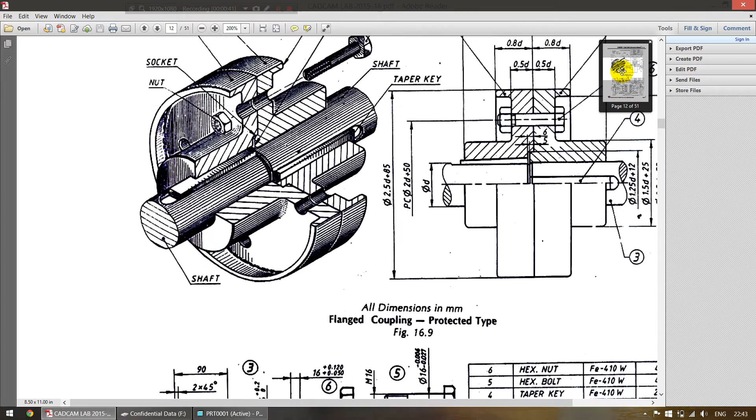Before drawing, I have a reference for the flange. I have a diagram, and usually the flange coupling looks like this. This is used for transmitting power and motion.

There are two flanges which are fixed by a bolt nut, actually four pairs, and these two shafts are used for transmission of motion and power.

And for rigidity in the shaft, we use a keyway, and we place a key in the keyway so that it's not free to move. Instead of a taper key, we use a flat key in this drawing, because a taper key would be a bit more complicated, and we'd see it in later stages.

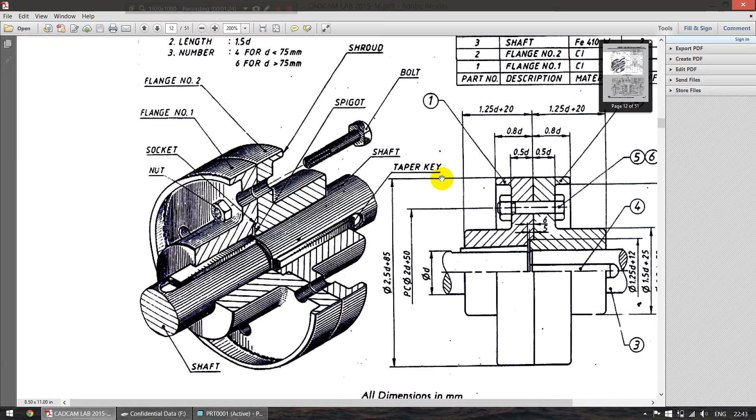So let's come to the protected type. We're actually drawing a protected type flange coupling, because in unprotected we don't have this extrusion, so it doesn't make a big difference. We'll see this, and then later on we'll move on to the unprotected type too.

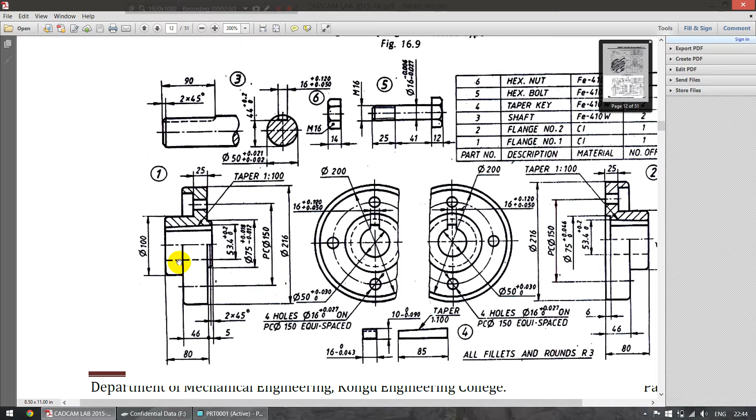So to draw a flange, let's go for flange number 1. This is the diagram for it, and I'm using these dimensions for reference.

This flange, how would you start? That's the main problem for most of us, because once you get to know how to start a diagram, it's easier later on.

So for me, I feel the best way would be, since it's a circular object, it would be better to revolve around 360 degrees. So this is the reference line as they have given, and there's a solid body here.

So draw the top half of the body and then revolve it around the same axis, so it gives you this circle.

So before starting the diagram, properly read the dimensions and understand the diagram clearly. If not, the complete diagram would go to waste, because during the assembly it would not be made properly.

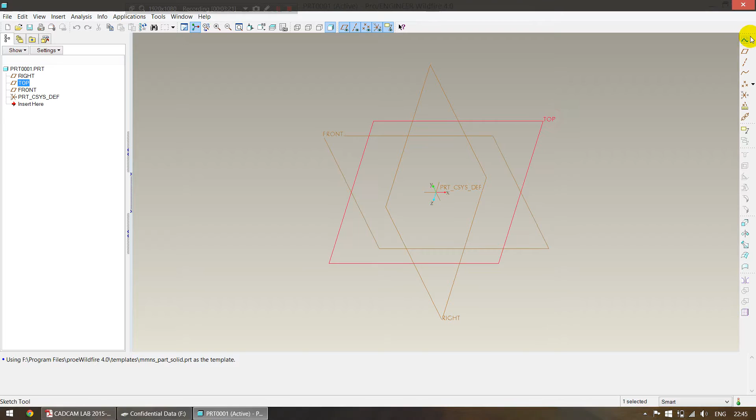Let's draw the rough sketch of this top half. Choose any of the planes and give sketch, and then just draw a rough sketch.

It's all just simple. Do not give these constraints, because it won't let you give dimensions to every single line. So just move a bit away from the constraint.

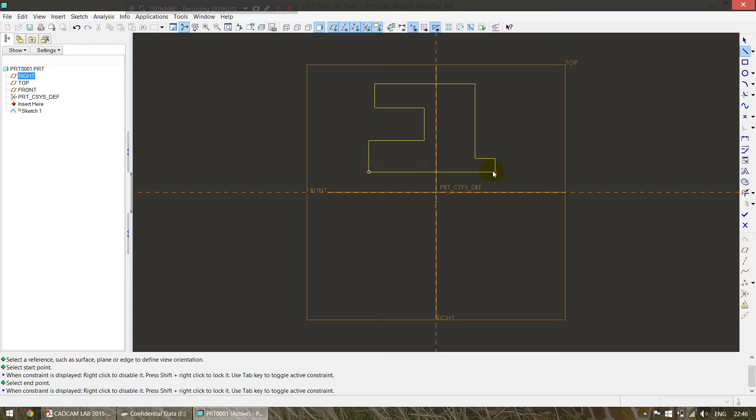Yeah, this is how it would look approximately. So read the dimensions. How much is this distance actually in the diagram?

So this distance, just till the bottom of the keyway. So this whole thing is 53.4, but including this, it would be - this is the diagram for the key, so...

The height of the key is given as 10. So you'll have to minus that length from this total length. So it would be like 53.4 divided by 2, and subtract 10 from that.

So 53.4... that will be around 26.7. So this is 26.7, this whole thing is 26.7, and this thing is 10. So this thing should be 16.7.

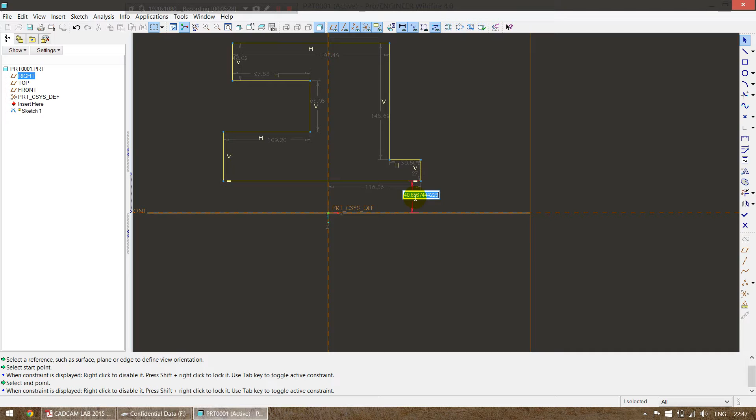So change the dimension just by double clicking it. 16.7.

And then what more dimensions can we give? Yeah, this thing is given. It's 75 minus 53.4, which would give the total length of this and this.

So dividing it by 2 would give one part of it. So 75 minus 53.4 divided by 2, it's 10.8.

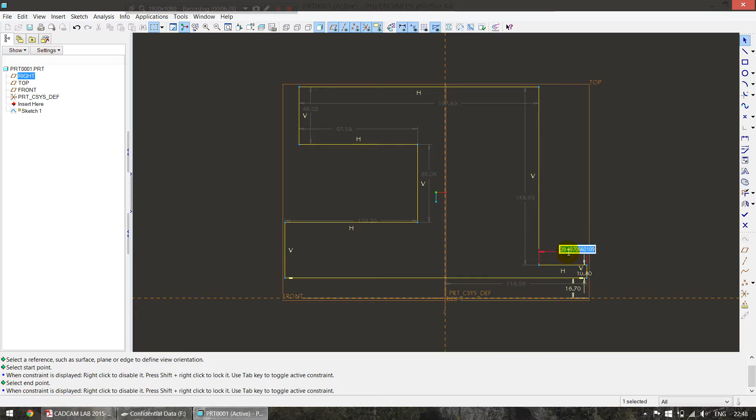It's really small. And the other part of it is this edge. It's given as 5. This part is given as 5. It's smaller than that.

And the height of this part, it's 75, and this whole thing is 216. So 216 minus 75 by 2 would be this whole height.

I'm sorry, this whole height from this point to this point. So given this point to this point, so it's 216 minus 75 by 2.

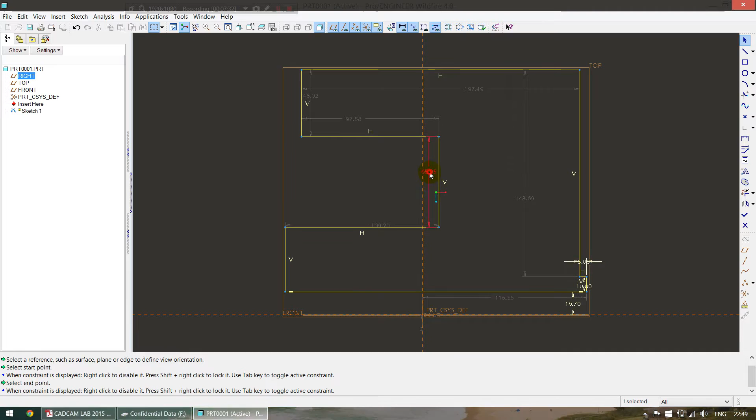It's 17. I'm sorry. It's 70.5. I'm sorry, 70.5.

Okay, so this is 16.7, and we'll have to adjust this height so that it comes back about the axis. So what is this total length?

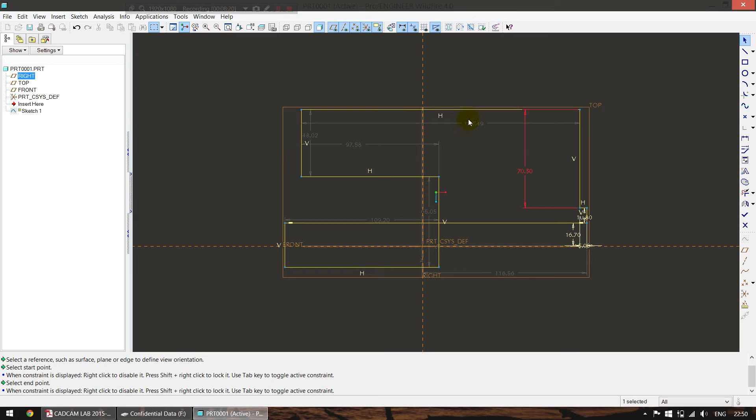This total length is given as 46, the top part of it, because it goes along this way. This total thing is 46. So this total thing is 46,

and I have to reduce all these dimensions now. And this is 97.

So this part of it, how long is this? 46 minus 25 would be 21.

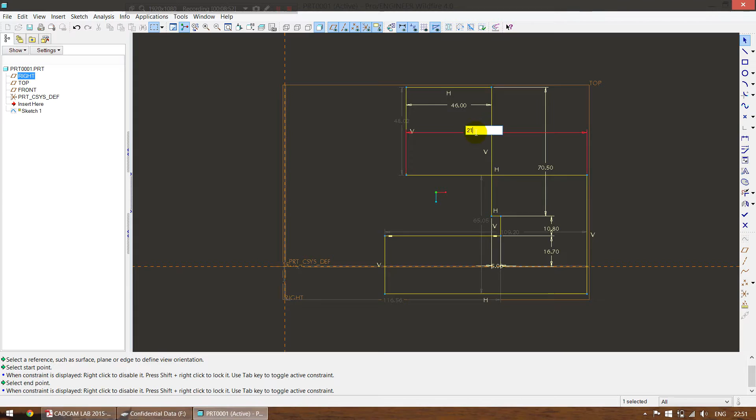So now the only problem is the height of this line. If we reduce that, this thing will come back to the top, and also the height of this. The height of this part can be estimated by this circle, because the total length is given as 216 and the inner diameter is given as 200. So 216 minus 200 is 16, and if you divide it by 2, because we are drawing only the top half, it's 8. So this height is 8.

It's again back to normal, and this height is now, the height of this line is what we need to know now, and this point to this point.

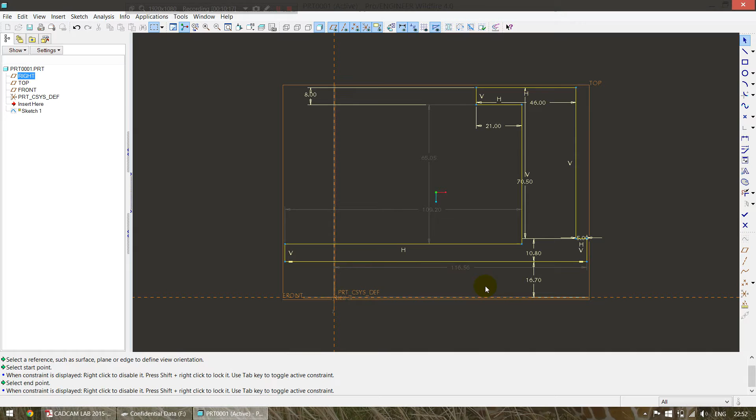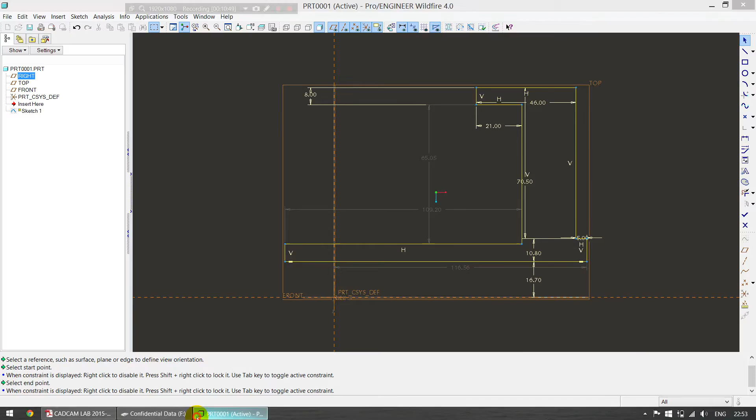Till this point it's 50, so we'll give dimension to that first. This point, it's 50 from this point to this point. So length of this is... this part is 25, so 80 minus 25 would be 55. So this length, it's 55.

Now remaining is this part of the length. So this height would be 75, right? Yeah, that's 75. And this total, this height would be 20 or 108. 108 minus 50, so that's 58.

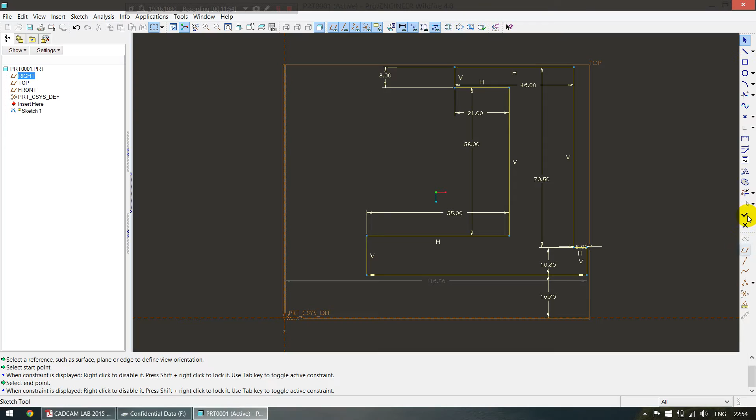So this is how the final object would look like, and if you give a tick mark, it would look like this, the final position.

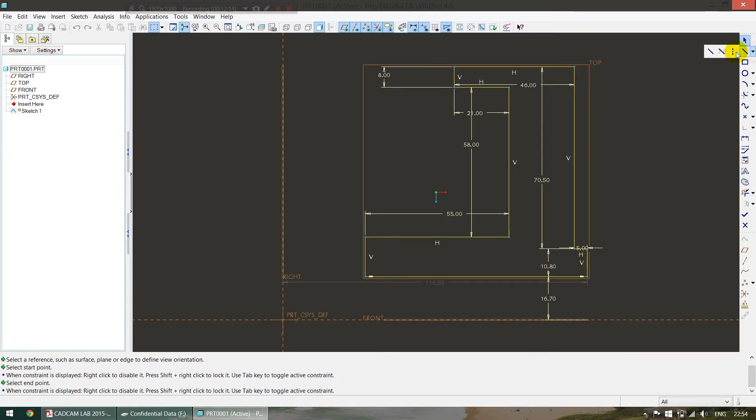So now we are not actually completed, so go to sketch and edit definition. You'll go back into the sketch. So now we need a reference axis, so choose this point and place the reference axis. So we're gonna revolve it along this axis so it comes round. So check this and come out of the drawing.

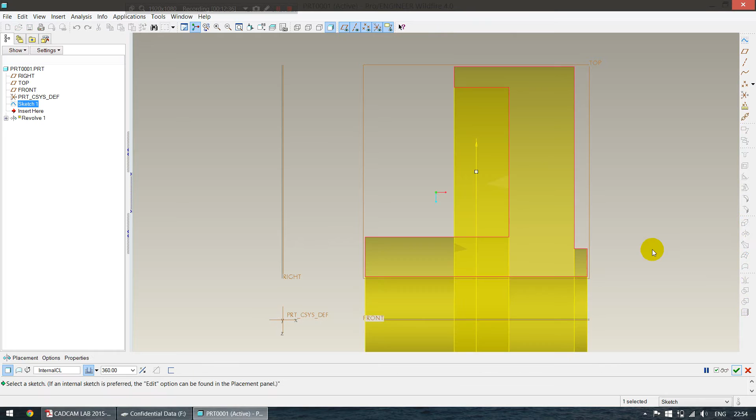So now use the revolve tool. We've got the flange, but it's still incomplete, but this is how it should look like.

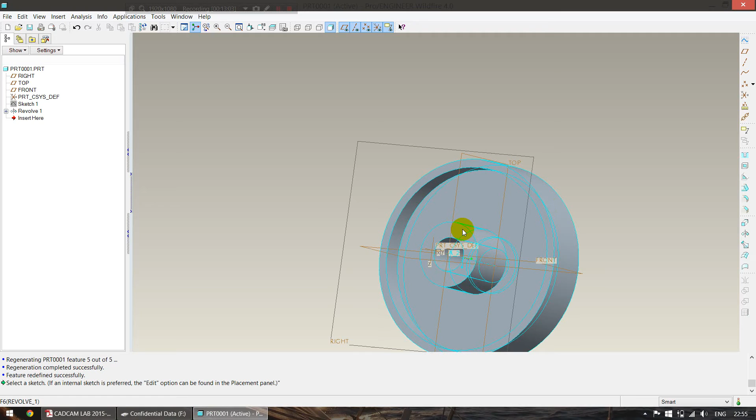Alright, now let's provide some chamfering, which is given here, 2 into 45. This dimension shows that it's chamfered 2 into 45. So all the sides where it's chamfered is this top, this edge, and the inner edge. So there are 3 faces where it's chamfered.

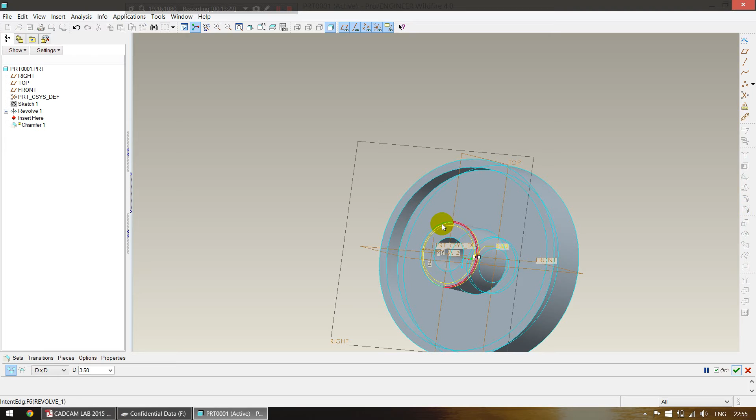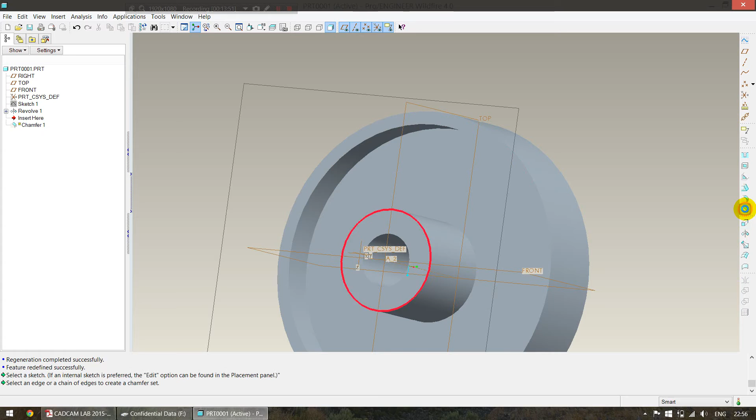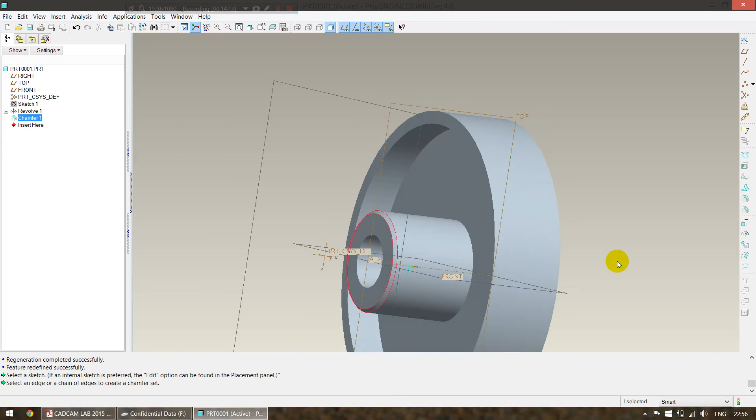So choose the chamfering tool and select this part. So select this part, give chamfering, and because it's given 2 into 45 degrees, go angle into D, and angle is given 45, and give the length 2. So it's chamfered. You can have a look that would look like this.

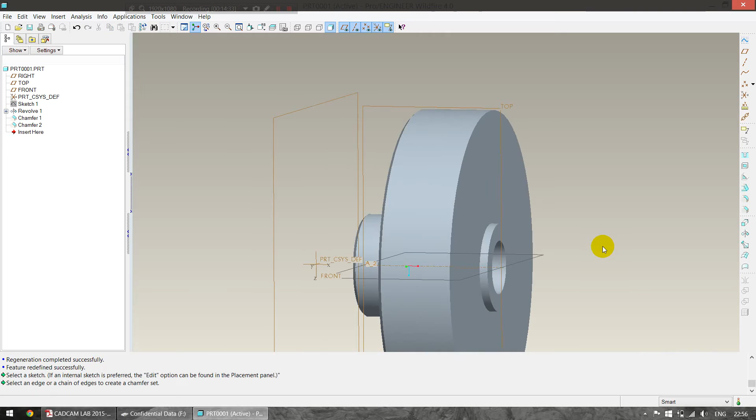So the other end would be this, and the other half chamfering, go for angle into D, the same thing, and then tick this, and this side too, these edges, chamfer for angle into D, and finish it.

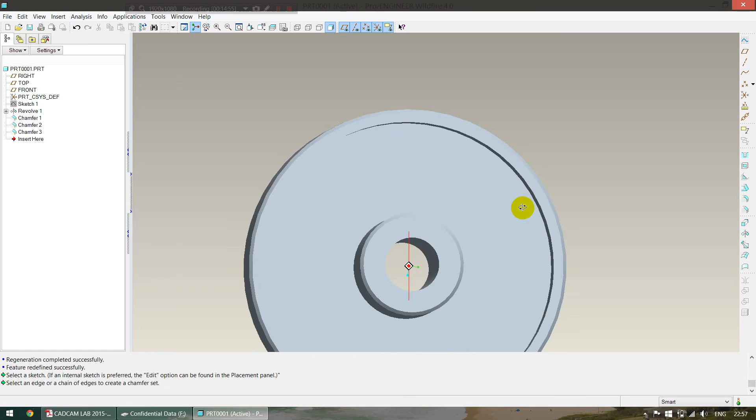Yeah, now it's done. Now for the keyway, we need to provide this keyway. So since the height of the key is given as 10, we'll give the keyway of 5 here and 5 on the shaft. That would actually compensate the height equally. So the keyway's height should be 5 and the width should be 16, and it should be from this circle.

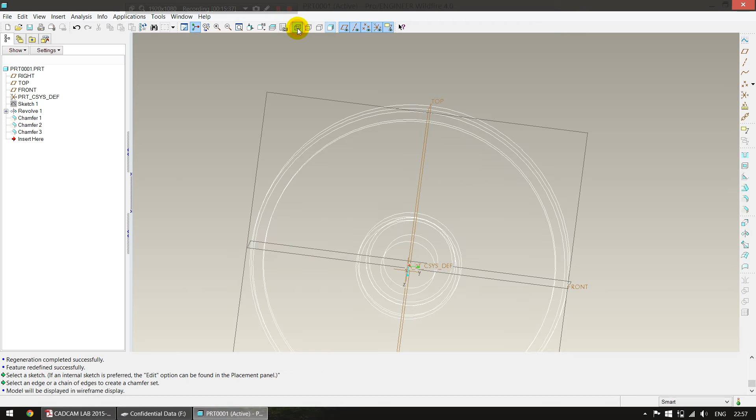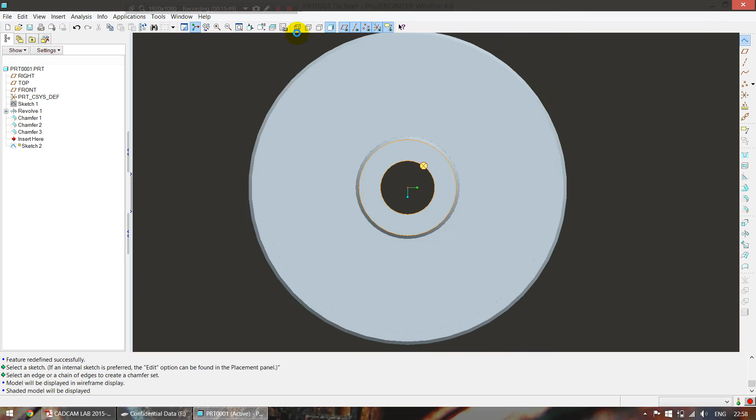So that would be like from this inner circle. So choose a wireframe and then choose this plane, sketch on it, and then go wireframe, and then let's set a reference for this inner circle.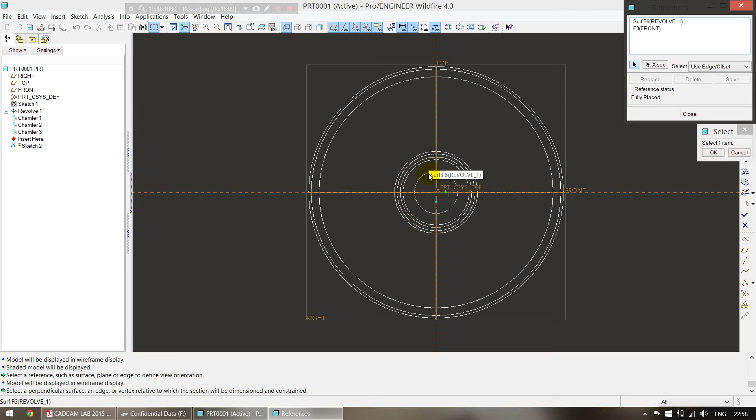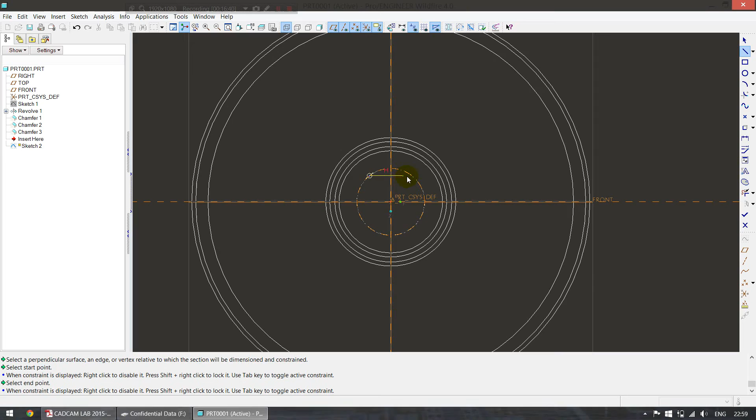So now we need a keyway, so choose line, and since we have set the reference, we get this marking over the circle. If not set for reference, you don't get the exact location. It doesn't get locked. Now if you move along, it gets locked. So just draw a rectangle. Just don't give any constraints, or since it's a rectangle, you can give constraints to 2 of those sides and then finish it.

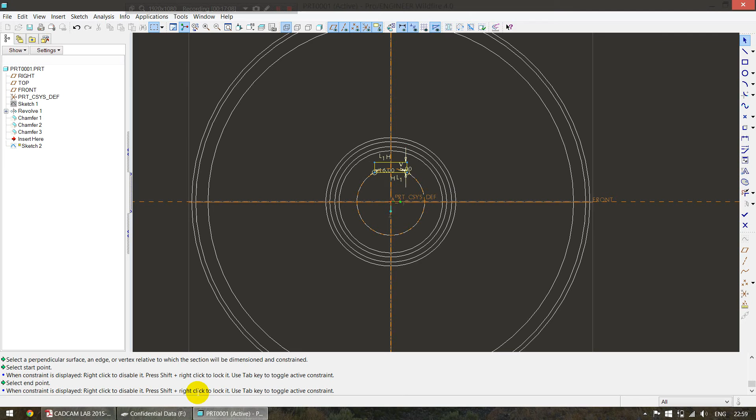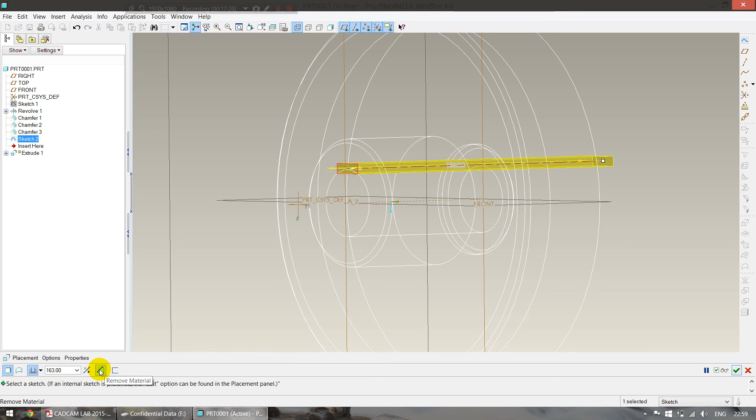So now this length has to be 16 and this length has to be 5. So now come out of the sketch and then go for extrude, because we are gonna remove material, and then turn the direction and then pass it through the complete body and select this remove material option so that it removes material, and just do this and you get the keyway.

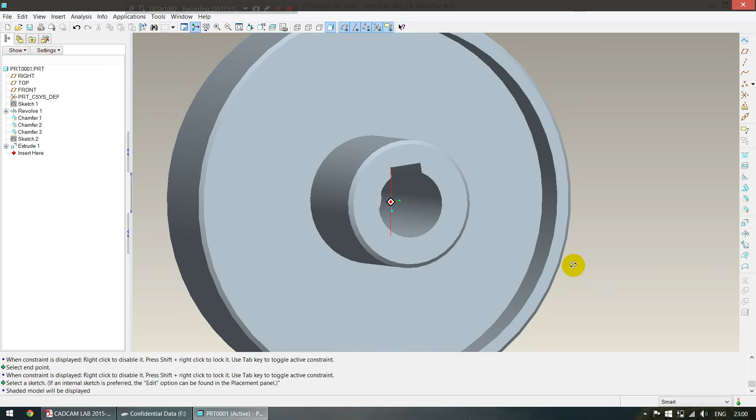So now we need to provide drilled holes for the nut and bolt. So let's sketch on this side. This is the most easiest part for a flange.

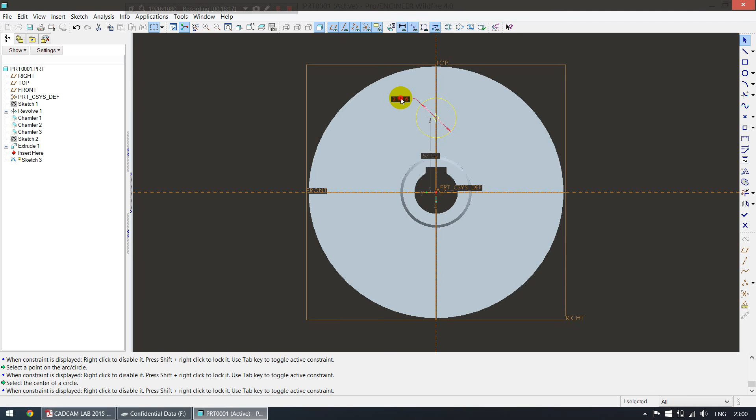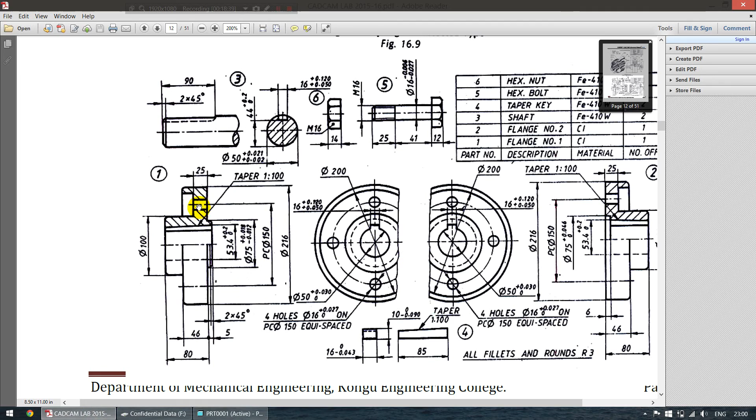Just draw a circle, then come out, and its diameter is given as 16. Its diameter is given as 16, so change it to 16, and the height from the center, it's given as this part is 150 by 2, it's 75.

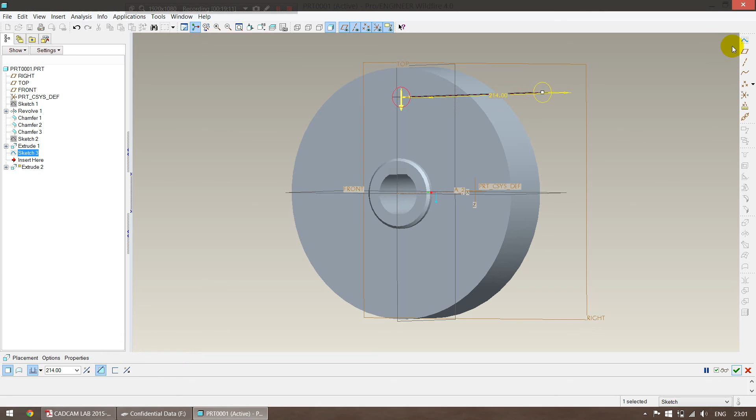So this is aligned, so come out of the command and repeat the same thing, extrude. Right, extrude and select this object, remove it through the hole, remove material, and then just tick. It's done. So now we need 4 holes along all the axes.

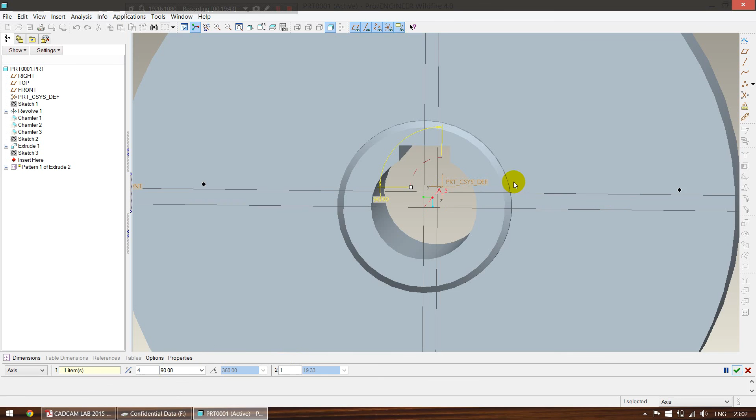So for that, let's just select this, go for pattern, so that we can revolve it around all the other axes. So choose axis, and choose any of those axes. 4 and 1, 4 you need, and 90 degree, every 90 degree you get 1. So just give tick and it's done. This is how the flange is made.